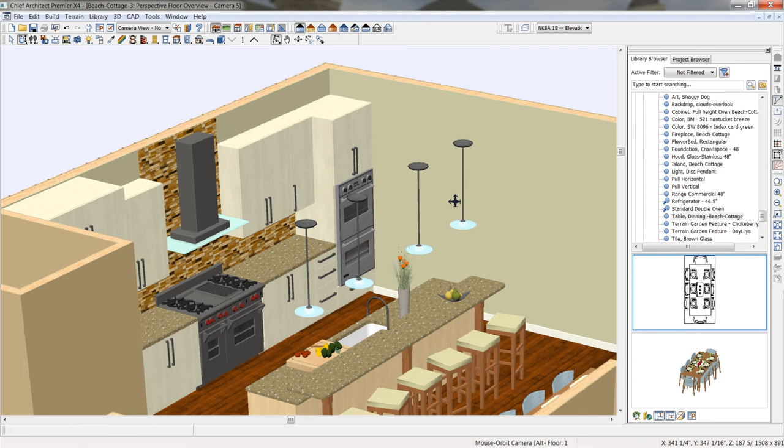I'm going to use my framing tool to draw a couple of beams in our kitchen. Again, this is in anticipation of when we build our second floor. We need a support mechanism to bear that wall that is inset on the second floor from the first.

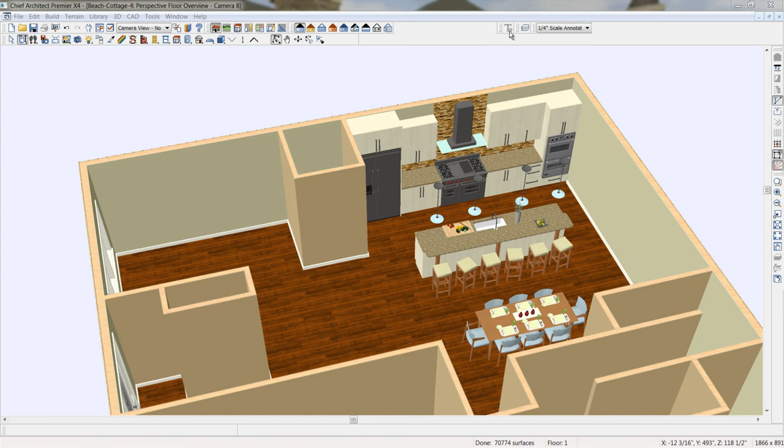So I'll close down my 3D view and use one of my manual framing tools to create a couple of beams. I'm going to select the framing tool here, and then we're just going to drag a beam across here, and I'm not going to worry too much about the exact location.

If we open up this beam, you can see the dimensions, and you can specify what sort of framing member it is. I'm going to just leave it as 12 inches by 3.5, and I'm going to have this bear exactly over the top of this bathroom wall.

Now I'm going to copy using my copy tool, and copy that. Let's just pull that out. As I'm pulling that over, I'm going to press the tab key, and when you press tab, you can specify an exact dimension.

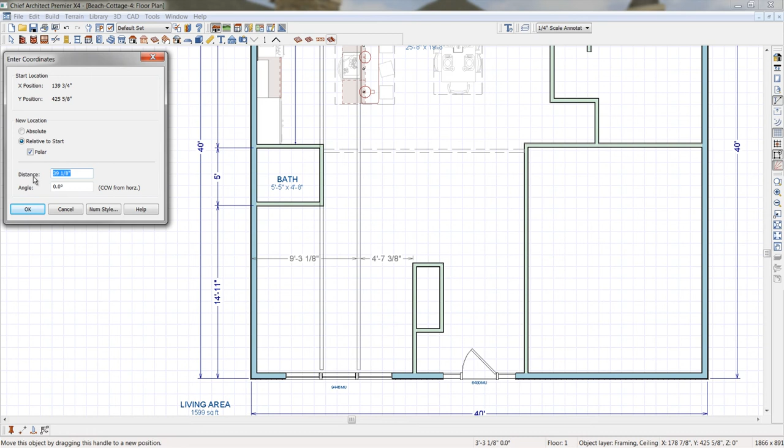In this case, I'm going to move it over 4 foot 3.5 inches because I know I'm going to put a fireplace over here to support the rest of that beam. Select OK. So now we have our two beams.

The next thing I'm going to do is use one more beam, and come across here and drag another beam. This one is not structural, more decorative.

So let's go ahead and select this beam, open it up, and I'm going to lower the dimension here from 12 inches to 6 inches. I'm also going to lower the height of this, and I want that to set about at the bottom of that beam.

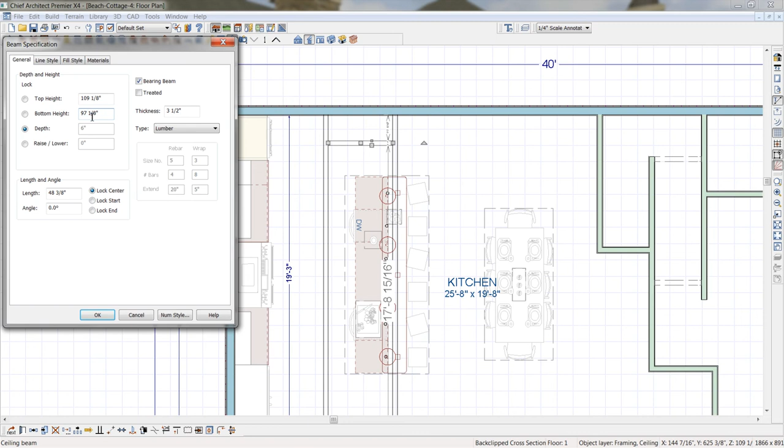We'll select OK. Now what I want to do with that beam is copy it in some increment all the way down to the bottom here. Let's go ahead. It looks like I didn't snap these two beams to the end of this wall, which we're going to want a beam pocket in with our detail.

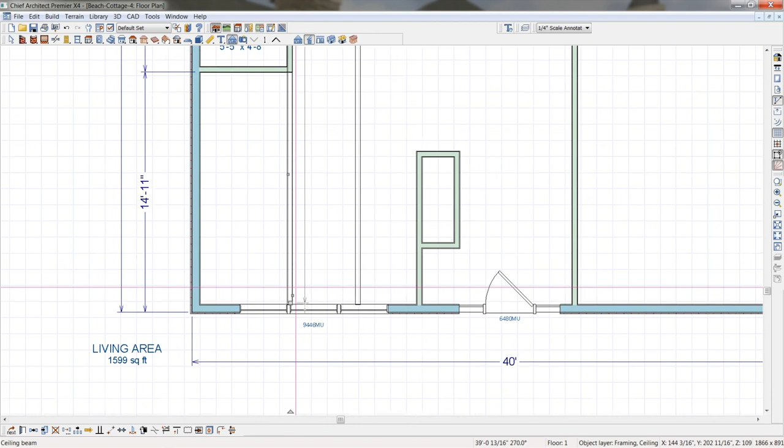So if I scroll back in here, let me zoom out so I can get the entire run of that in. I'm going to select that beam we just drew. Let's make sure I have it exactly snapped into place. Snap that to the edge.

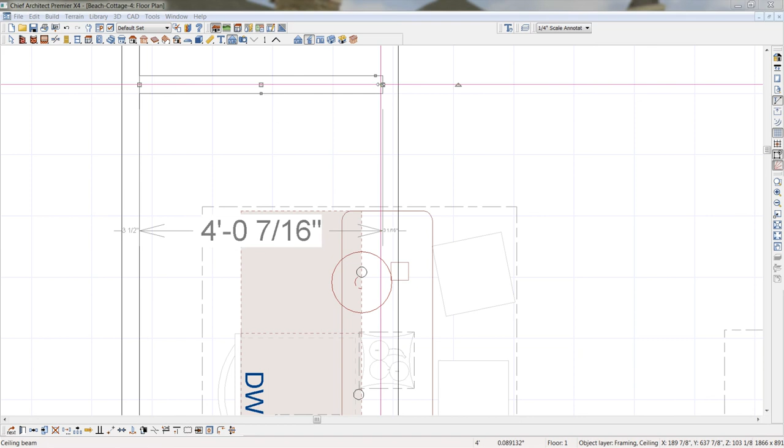Once I have that snapped, I'm going to use my multiple copy tool, and I'm going to set that to be 18 inches as I copy that. Now I can just drag that all the way down.

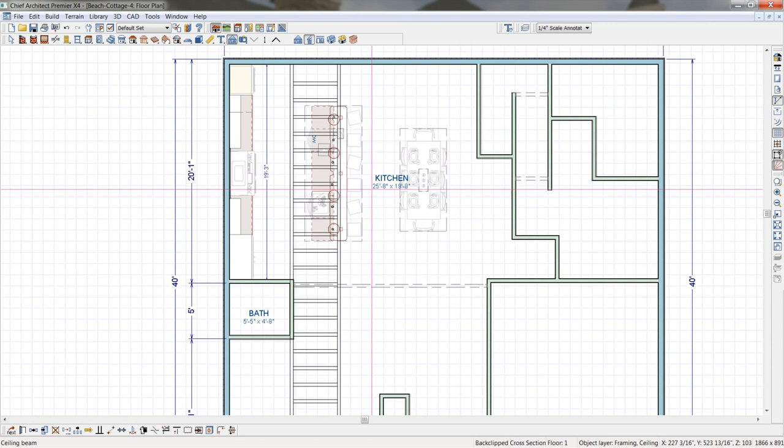Now before we take our 3D view, let's take a look at the impact of our island. We may want to pull that back a couple of inches, so let's set that to be 4'3" and pull that back in there a little bit.

And we can kind of see where our electrical lights, if they're going to go through those beams, okay. It looks okay, we can always make adjustments a little later. Let's go ahead and take our 3D view.

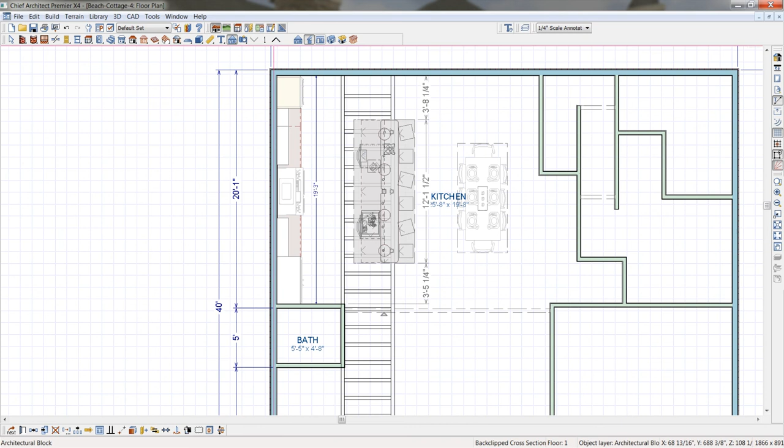I'm going to again use our overhead camera, and let's turn on our layer for the ceiling framing so we can actually see it. So here it is. And if you want to match the colors, we can grab the color eyedropper, pull that in, and we can paint these elements.

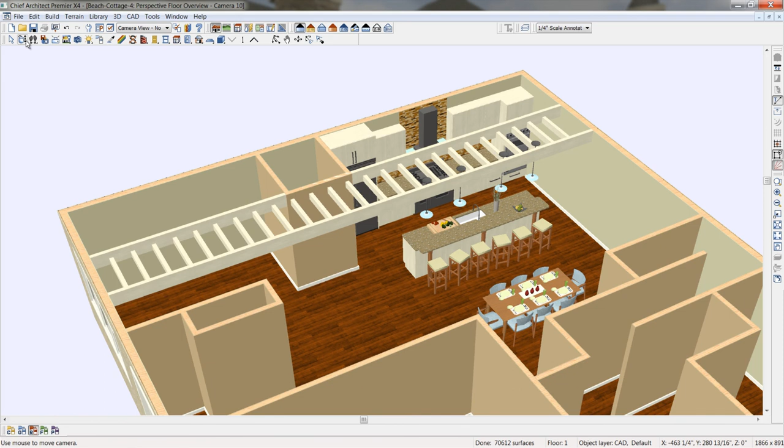Let's go ahead and paint all of them. And maybe what we want to do is apply a darker color to this outside beam.

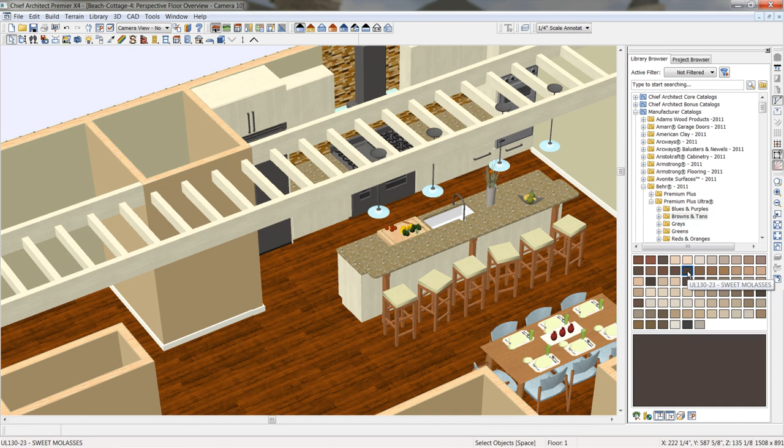So what I'm going to do is find a darker color here. Open up the library and let's just find a darker brown. So I'm going to open up Behr Paint.

And we'll pick one of these colors, and I'm going to change it just so it applies that to one of the beams. We'll apply it to both sides.

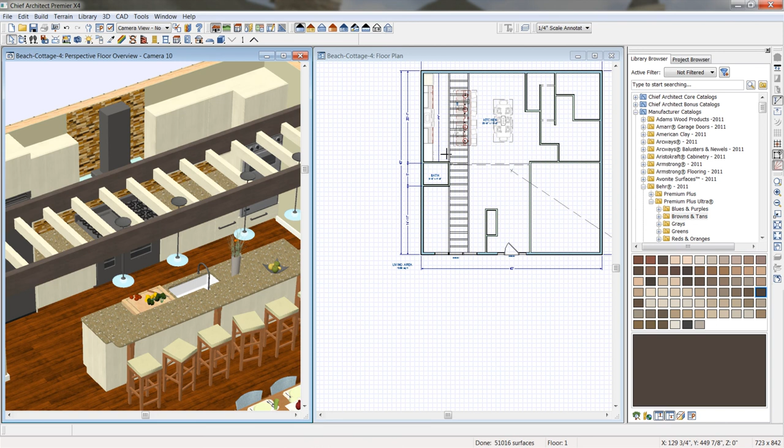I may want to pull that out just a little bit so that we don't see that in our wall above the bathroom. So let's go ahead and pull that over here a little bit, set that to be 6 foot 1 inch, and see if we can slide that out a little and see if that solves our issue there.

So now we can see that beam coming through, and that's how we did our custom ceiling. We'll also use that as a bearing point when we design the second floor.

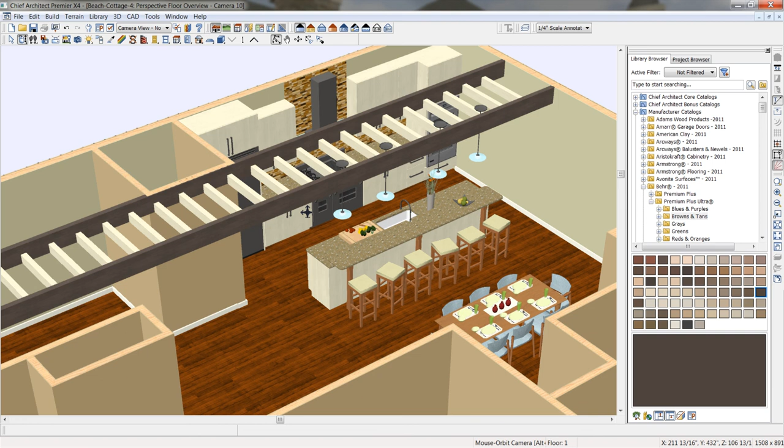As we progress along, I'm going to go ahead and fast forward and put the remaining doors and windows in. Next, I'm going to build the foundation, the roof, and the framing. So let's go ahead and get started with that.

I'm going to pause here for just a second, and I'll fast forward to having the windows put in, and then we'll move forward.

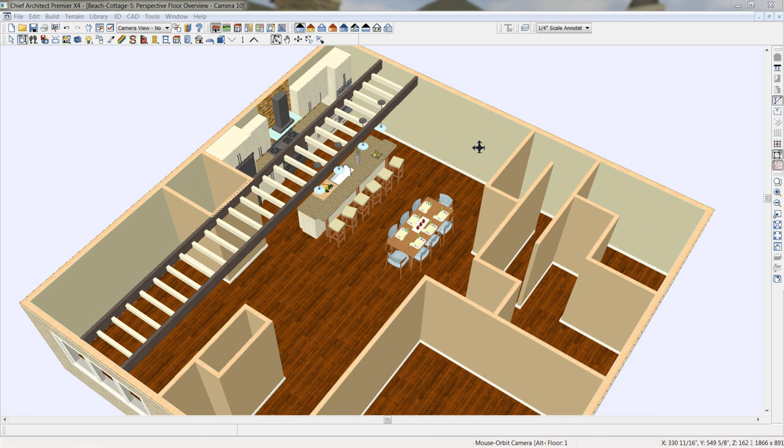I've gone ahead and added the doors and windows in here to speed things along. I also applied a carpeting material in the area that will be the bedroom and then also the closet.